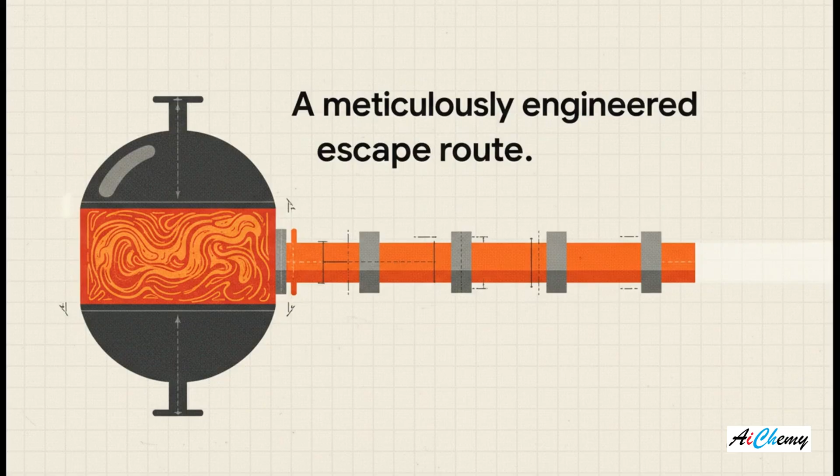So, how in the world do engineers design this lifeline? Well, we're going to follow their process. We'll start by imagining the worst possible day. Then we'll map out the path to safety, calculate its size down to the millimeter, figure out how to control the violent forces inside, and finally, see how we turn that design into a real-world guardian.

First things first. Before you can even begin to design a solution, you have to understand the problem in its most extreme form. And for engineers, that means anticipating every credible thing that could possibly go wrong. I mean, that's the real challenge here, isn't it? You're literally designing for failure.

Engineers have to consider all these different, unrelated potential problems, but not totally impossible scenarios. The industry standards call this avoiding double jeopardy. Basically, you don't design for a fire to happen at the exact same moment a power failure strikes, unless one could cause the other. You design for the single, worst credible event.

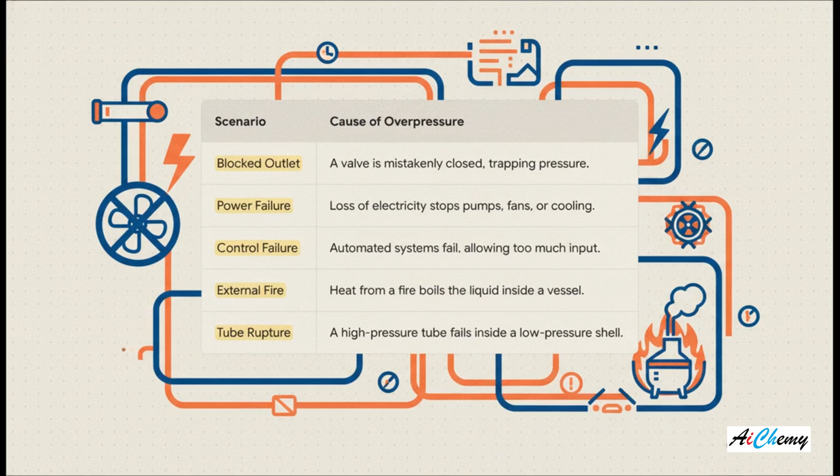And believe me, the list of potential causes is long. Standards like API 521 lay it all out. Engineers analyze everything from a simple blocked outlet to a major power failure or even an external fire engulfing the whole unit. They calculate the amount of stuff that needs to be released, the relief load, for each scenario, to find the one that requires the biggest escape route, and that one becomes the basis for the entire design.

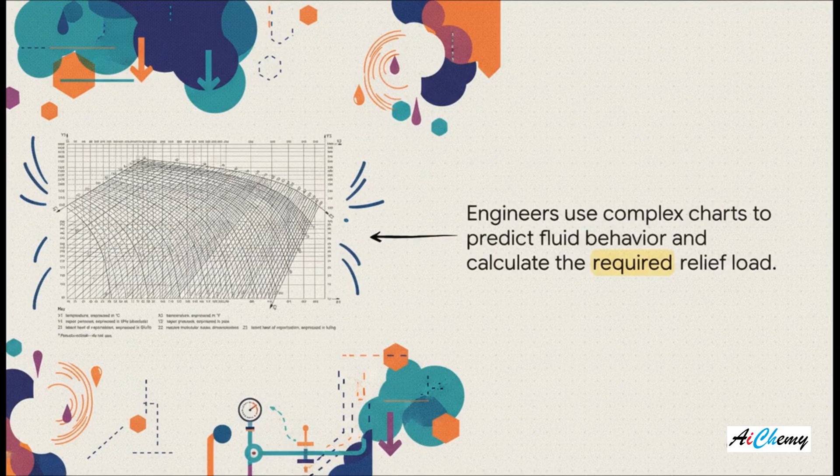So, once you know how much needs to get out, you have to design the path. And the physical layout of the piping isn't just about connecting point A to point B. No, it's a critical safety feature all on its own. There are some fundamental rules you just have to follow.

You keep high and low pressure sources in separate main pipes or headers so they don't interfere with each other. You have to slope every single pipe so that liquids can't get trapped and create a blockage. An individual line should always enter the main header from the top, kind of like an on-ramp on a highway, so that any liquid flowing in the main pipe can't back up into a relief line. It is all about making sure that path is always clear.

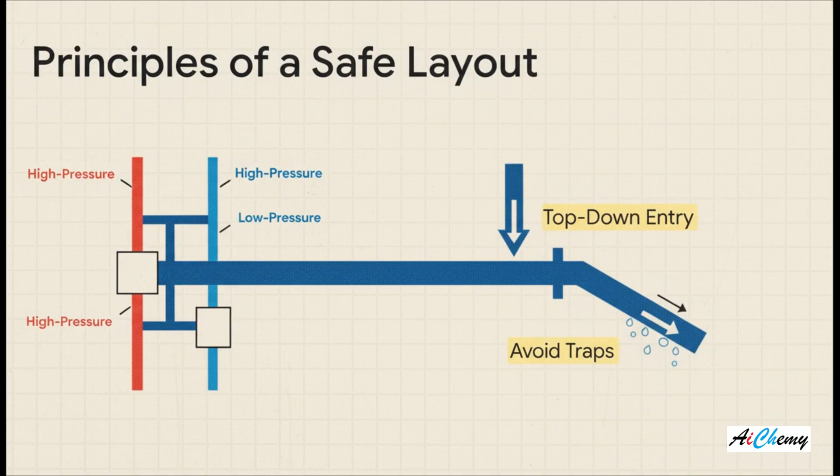And now we get to the core of it, the calculations. Sizing the pipe is this critical balancing act between physics, safety, and of course, economics. Okay, the single most critical factor here is something called backpressure. Think of it as a force pushing back against the safety valve, trying to keep it shut.

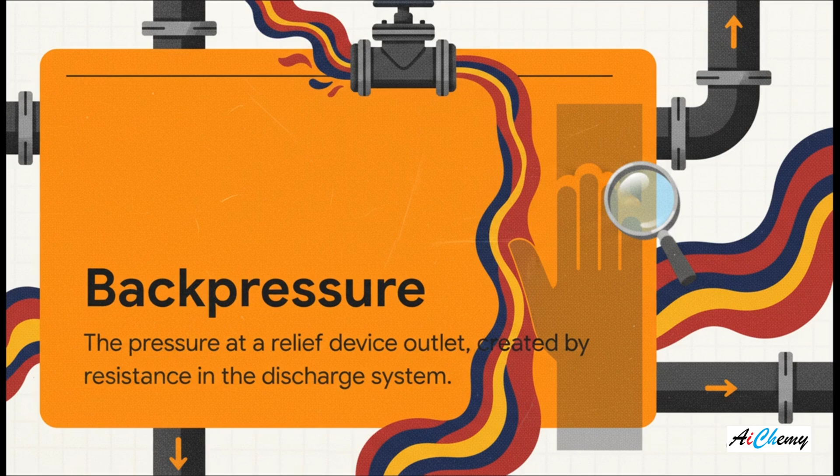Now, it's made of two parts. First, you've got superimposed backpressure. That's the baseline pressure that's always just sitting there in the discharge system. Then, when the valve opens, you get built-up backpressure, which is created by the friction of the fluid itself as it's rushing through the pipe. If the total of those two gets too high, it can literally stop the valve from opening properly, a total disaster.

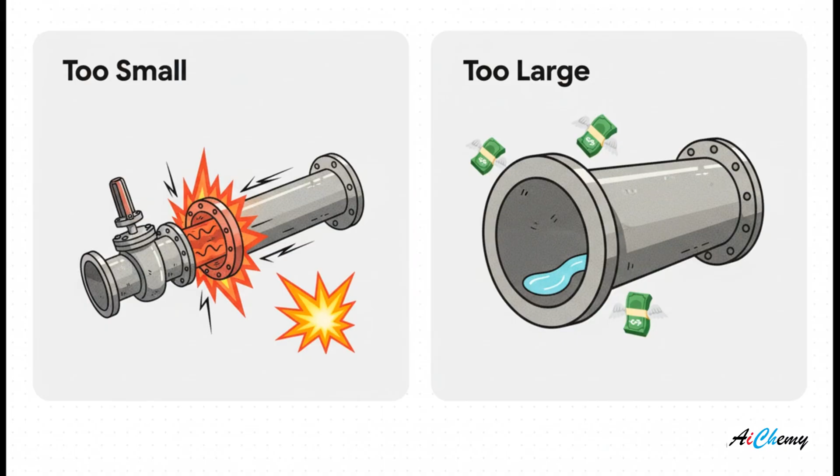So getting the size just right is absolutely crucial. If the pipe's too small, that back pressure skyrockets and the whole system could fail. But if it's too large, it's just incredibly expensive and wasteful. And here's a key detail. Engineers have to size the pipe not for the expected amount of flow, but for the valve's absolute rated capacity. That's the maximum amount of fluid it could ever possibly release. You have to design the escape route for the biggest crowd imaginable, not just the one you expect.

Beyond back pressure, there is a hard speed limit. The velocity of the fluid has to be kept well below the speed of sound, or Mach 1. Because as you approach that speed, you start to get shock waves and extreme turbulence inside the pipe itself. To prevent this, industry standards recommend a very strict limit, typically around Mach 0.7, just to build in a critical safety margin.

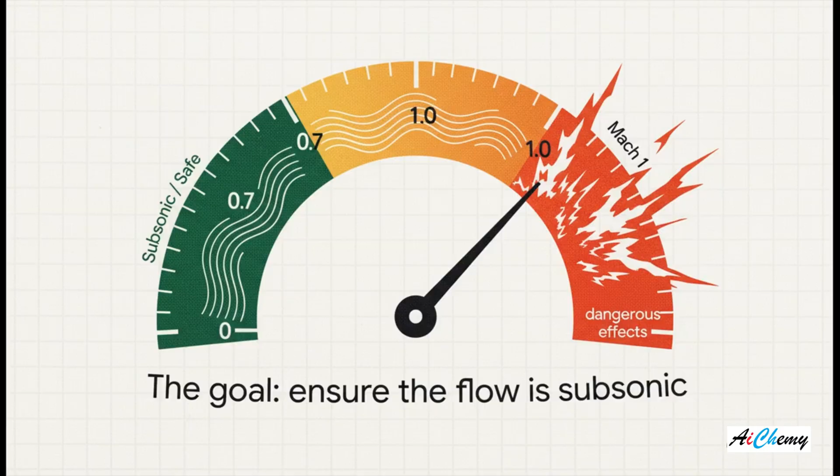And that speed limit brings us to the violent side effects of one of these relief events. When you force that much gas through a pipe that fast, it gets incredibly loud and incredibly shaky. The technical term you'll see in the standard is acoustic-induced vibration fatigue failure, and that just brilliantly illustrates the danger. It means the sound, the acoustic energy of the gas rushing through the pipe, is so powerful it can literally shake the pipe until the metal gets tired and just breaks. The system can destroy itself from the inside out.

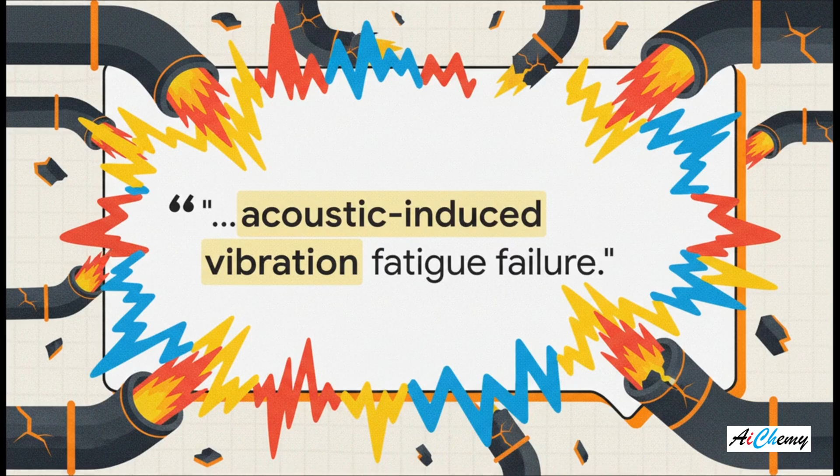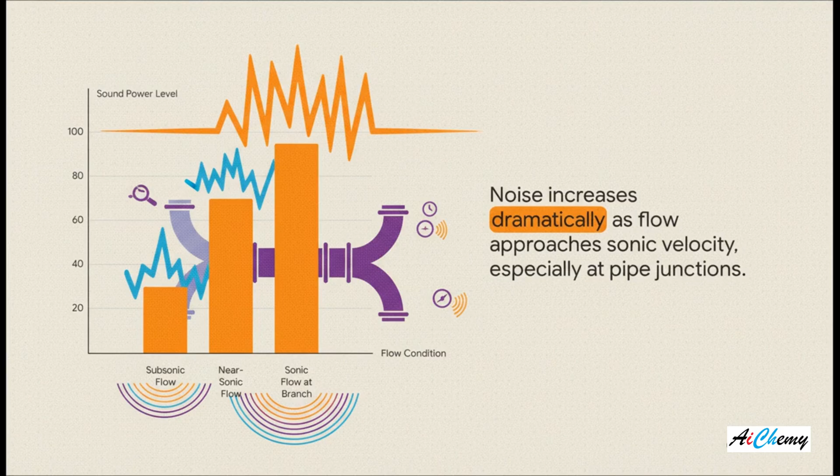This chart shows you exactly why that Mach 0.7 limit is so important. At normal subsonic speeds, the sound power is, well, it's manageable. But as you get close to sonic velocity, it increases dramatically. And check this out. At a branch connection, where one pipe joins another, that noise, and therefore the vibration, can spike to extremely dangerous levels.

So how do you tame this beast? Well, engineers use a bunch of different strategies. They can use thicker pipe walls to withstand the shaking. They can specify special low-noise valves. And, this is a big one, they design smoother pipe connections. Using a sweeping, curved entry instead of a hard 90-degree angle makes a huge difference in cutting down the turbulence that creates all that destructive noise.

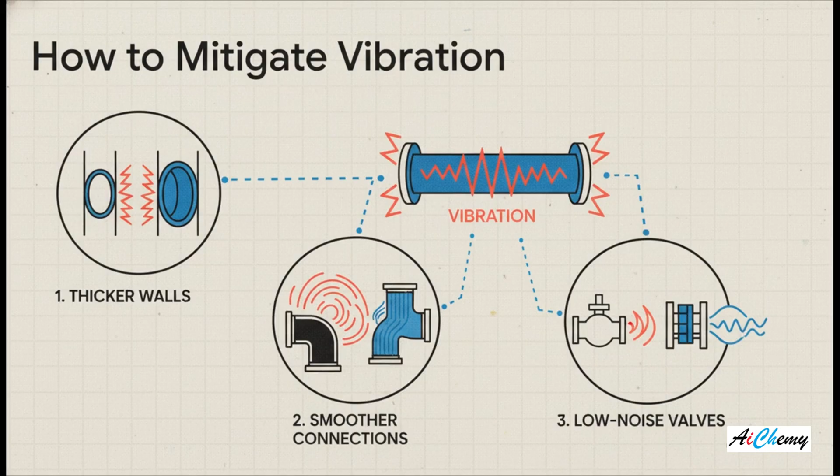All right, so you've got a perfect design on paper. It's useless if it isn't built correctly. The installation phase has its own set of critical challenges to make sure the system actually works the way it was designed to. That pipe is going to expand or shrink violently as super hot or freezing cold fluid suddenly blasts through it. So it has to be supported with enough flexibility to allow for that movement.

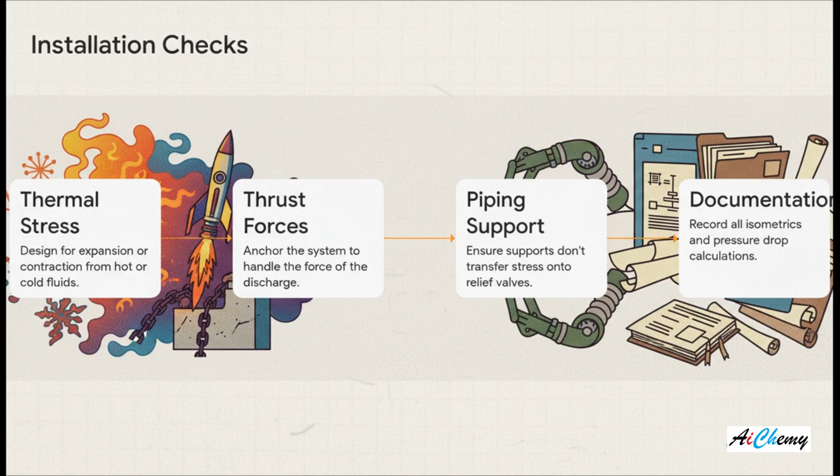At the same time, the sheer force of the fluid whipping around a bend creates immense thrust. We're talking like a rocket engine that has to be anchored to the plant structure. And of course, every single calculation, drawing, and decision must be documented for the future.

And that right there is the whole journey, from a potential disaster to a robust, reliable safety system. It's a silent guardian, a network of steel designed with incredible foresight and precision that stands ready 24/7 to provide that one, single, all-important escape route when it is needed most. This entire complex system is designed to be invisible, to hopefully never even be used.

It really makes you think, doesn't it? What other pieces of invisible engineering are out there quietly keeping our world safe every single day?